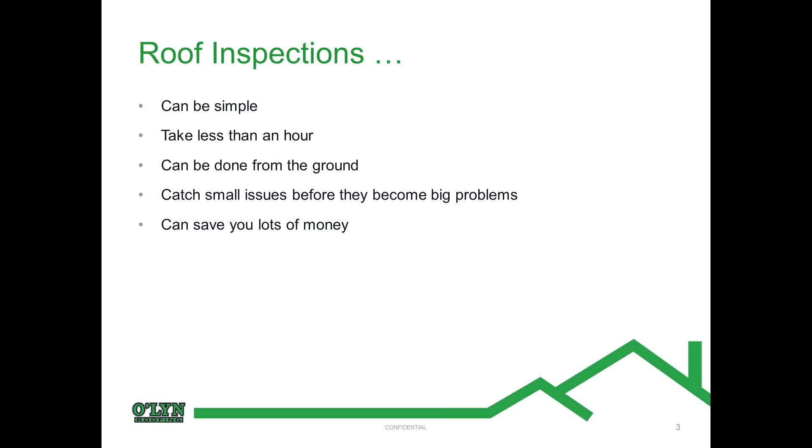All this by spending 45 minutes walking around your house and spending a few minutes in the attic or crawl space. So as we can see, by being proactive and taking a little bit of time this spring, you can literally save yourself thousands of dollars.

So Mike, what would you recommend a person take with them when they set out to inspect their roof from the ground? That's a great question, Dan.

To inspect your roof and related areas, all that is needed is time, a pen and something to write on, a pad of paper, and a pair of binoculars. All of those would be sufficient to get a good, accurate early indication of what's going on with the roofing.

When I am at some of the home shows at our booth, I cannot count how many times homeowners have pictures on their phone to show me. This is another great proactive way to approach what you need for your roof. I've looked at 10, 20 pictures of a certain area—whether it's an ice dam that could lead to mold, or a fascia board that might have a problem that could lead to water coming into the roofing area and then into the home. These proactive measures can save you tens of thousands of dollars by catching them early.

So Mike, in your experience, if a homeowner is out doing their inspection and comes across something they can't completely identify but recognize as being wrong, improper, or unusual, would you recommend they take a picture, so if they speak to a roofing professional, they have that information? They can even send it before the first meeting, right?

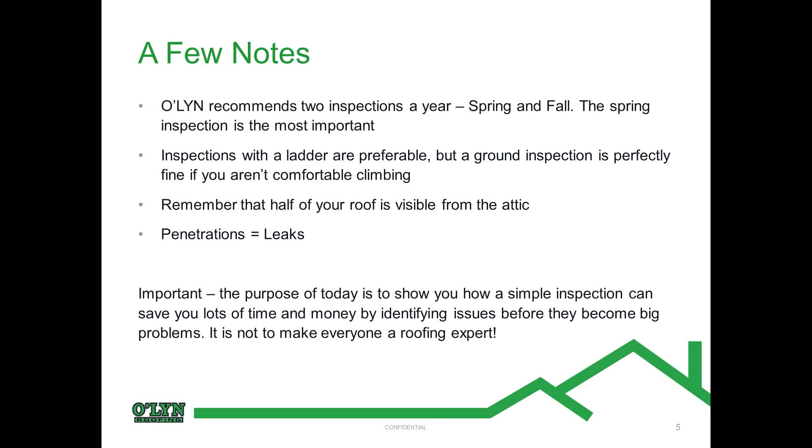So, Mike, give us a high-level overview of the components to a roof so that as you reference things later on, people will understand what you're referring to. Yeah, I think that makes sense.

This is really just a quick rundown of the different pieces or parts of a roof that make up a complete roofing system. It's important to think of your roof that way. If it's thought of as just a bunch of shingles, it's like the analogy of oil is oil, where we know synthetic oil, semi-synthetic oil are important for various engines in the automotive industry, similar to roofing.

So we'll look at this as a roofing system, and I'm going to break that apart the best I can for you. If we start at the peak of the roof, we'll start by looking at the ridge vent. This traditionally is a ventilation product that allows heat and humidity to escape at the peak or the top of your roof. This will be covered by roofing shingle caps as well. It's extremely important due to this ventilation.

It's important to remember, without proper ventilation, and the way houses are built so tight today, it's very easy for a roof attic area to create mold and mildew. And now you've got not only an area that's unhealthy, but an area that's going to need attention right away. So roofs need to breathe. Roofs absolutely need to breathe.

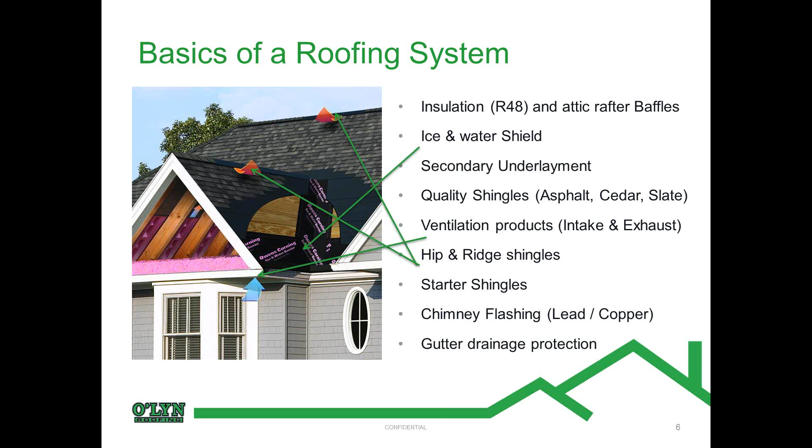So, Mike, now we've got our inspection tools, right? But before we go outside, what should we be looking for? Right.

It's important—the chimney is an area we haven't talked about. It's very easy to see when the lead around a chimney, or the counter base flashing as I call it, starts to pull out and pulls away from the brick of the chimney. That's a very good indication it's time to have that replaced.

Anytime you strip and reshingle a house, you'd almost always want to replace the base flashing and counter base flashing, the lead, on a chimney. Those leads don't last forever, and it's important to do, unless a mason had been there within the last 2 or 3 years. But that can all be seen from the ground.

It's important to take a look at the drip edge and make sure that hasn't loosened or fallen off. Vent pipes must be checked as well—look for deteriorating rubber or flashing that is lifting around these vents. These are all entry areas for water to seep into your interior living area.

Checking the gutters to make sure they are flush against the fascia board—that's the piece of wood the gutters rest up against.

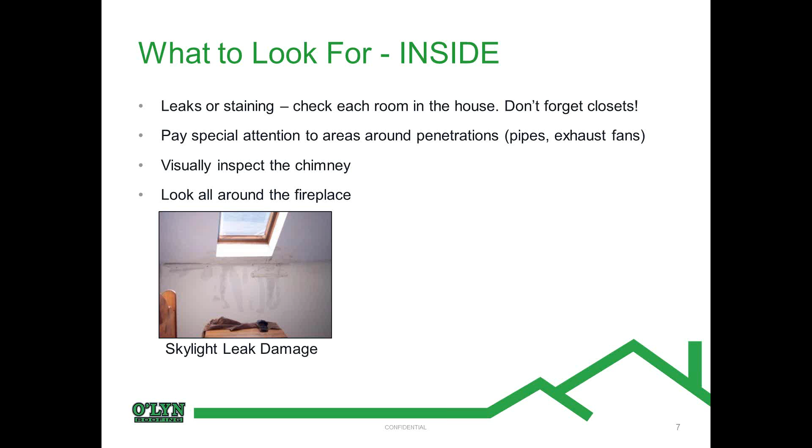So do you want to talk about what to look for inside the attic? I think that's a good idea. Okay, let's go to that—what to look for inside the attic. Mike, take it away.

As you make your way into the attic, the fun really begins. Right away, you've got your flashlight, your pad of paper, watch your head. You'll notice hundreds of nails sticking through the sheathing, and that's how they should be—you would never stop a nail just into the sheathing, it has to be through. These nails are called ring nails, and you want those ring nails to expose through the sheathing. In any event, watch your head—you could easily stab yourself. Be careful, that's my point.

Let's start at the top or peak of your roof when you're in the attic. Just sit or stand for a minute and see if you can feel any movement of air, and note that. If it feels very stuffy, it most likely is. If you feel some flow of air, you might have good intake or soffit venting, and good exhaust or ridge venting, or a power fan or solar fan if that's your exhaust method. Check to make sure you actually have a ridge vent—you'll be able to see it when you're in the attic if you didn't see it from the ground.

If you do have a ridge vent, see if it's clogged. Some of the older ridge vents were basically like a sponge cut in half, and that's the density of old ridge vents. If you think of that density, it's very easy for heat and humidity, which rises, to fill those vents and clog them.

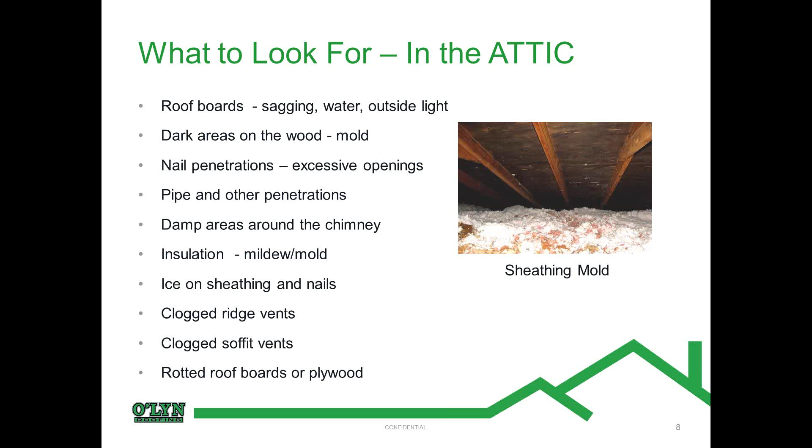So really the ventilation is critical, intake and exhaust, as well as the insulation. You're probably in a lot of under-insulated homes. I am, yeah—I'd say probably 80% of the homes I go into.

Okay, so we've looked around inside the house, we've looked up in the attic, and now we're outside.

So take us through what we should be looking for outside.

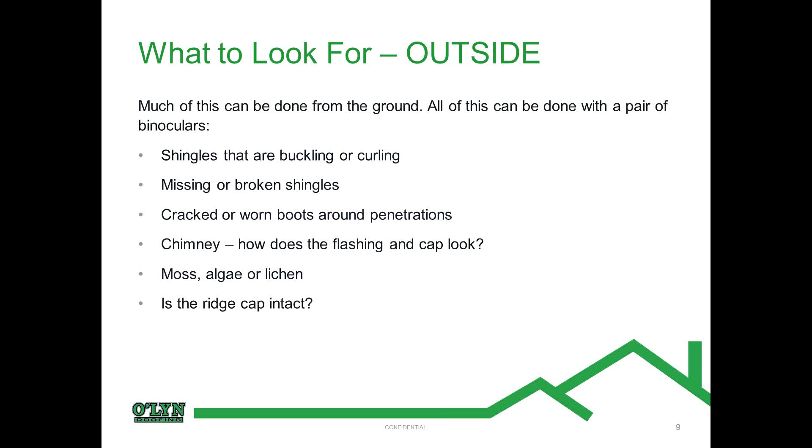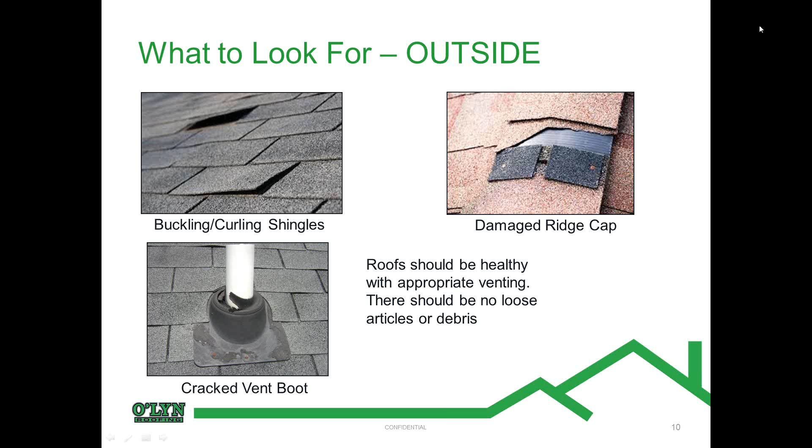This allows water entry into your home, as I just mentioned.

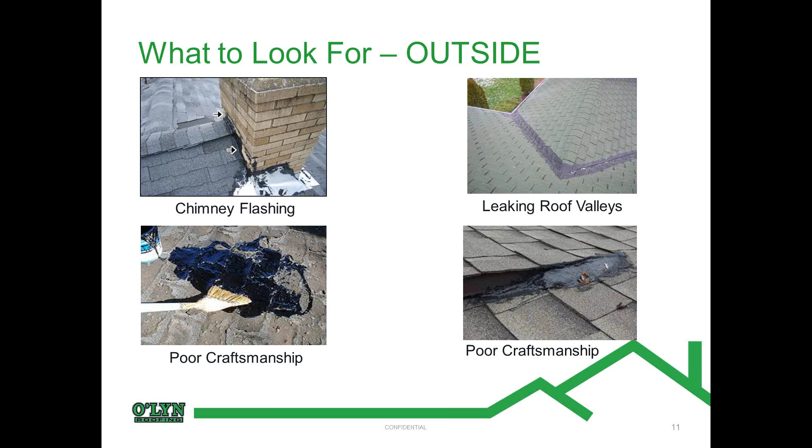Now also, during your inspection outside, take a look at the gutters. A lot can be learned by what's in the gutters. If there are plenty of granules in the gutters, you can be certain the shingles need to be replaced.

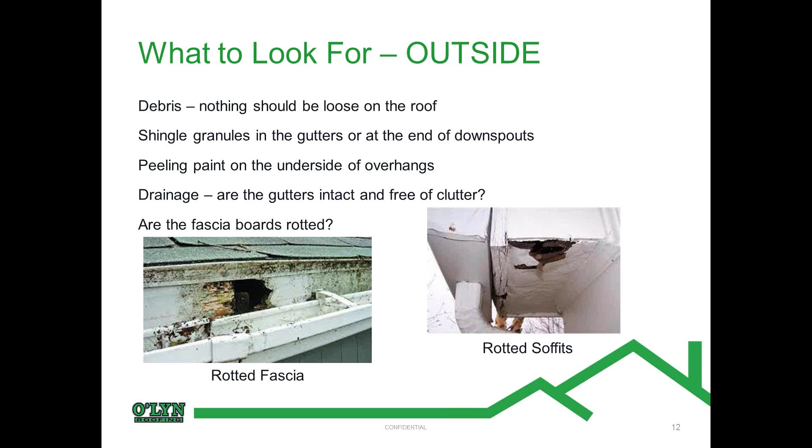So Mike, what should a person do if they uncover these sorts of issues? Even though some of these damages can be repaired by homeowners and handymen, they're all very short-term fixes and will require an expert to properly repair. I'd certainly think it would be a smart idea to get in touch with an expert roofer to take care of these.

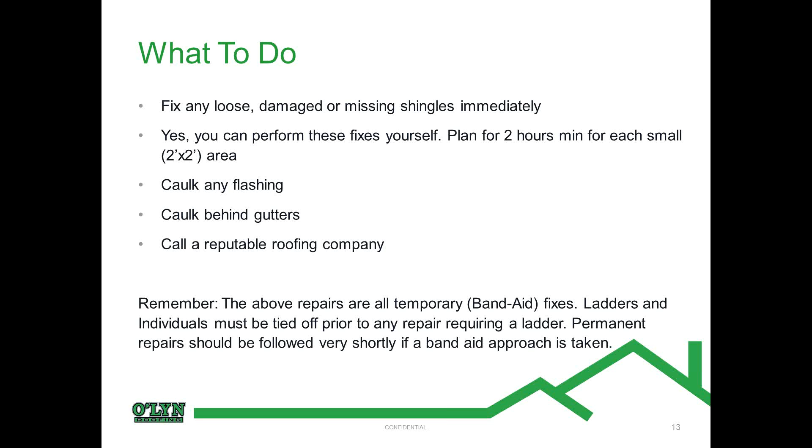Unfortunately, almost 40% of new roofs we install are less than 5 years old, which is a scary number. This is a combination of poor craftsmanship, cheap materials, the wrong materials. I've seen many contractors who specialize in siding, painting, kitchens, etc., decide they're now roofing experts and want to get into the roofing industry. That, my friend, is where I say caveat emptor. Beware of who you hire, and make sure the workmanship warranties are real.

That's a good point. Just a couple quick numbers about the home improvement industry in general: the Harvard Joint Center for Housing reports there are about 800,000 home improvement contractors in the U.S., and 50% of those fail within the first 3 years. Home improvements are ranked #1 in customer complaints by the National Association of the Remodeling Industry, a very reputable group.

These complaints are primarily a result of three things: the lowest priced person or the handyman, incomplete contract details where the job isn't scoped accurately, or broken promises, scams, shortcuts, leaving too early. Everybody's heard the horror stories of putting a deposit down and the contractor not showing up, or even paying in full and the job left half completed. These are all very real things. It bothers us here at O'Lyn because we try to do things the right way, and when people run around giving your industry a bad name, that doesn't help anyone.

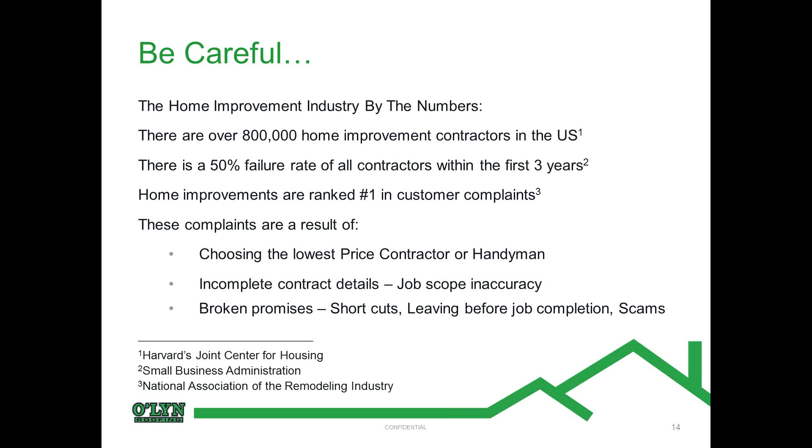It certainly doesn't. So with all of that in mind, be happy to take your questions at this time.